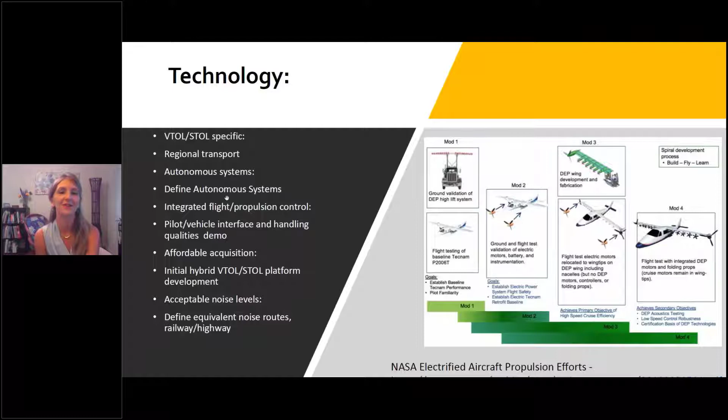Knowing the market and future demands of our communities is important to the success of a rapid implementation of eVTOL. Making these assessments, expanding on and leading with these resolutions will make it easier to implement into the community efficiently.

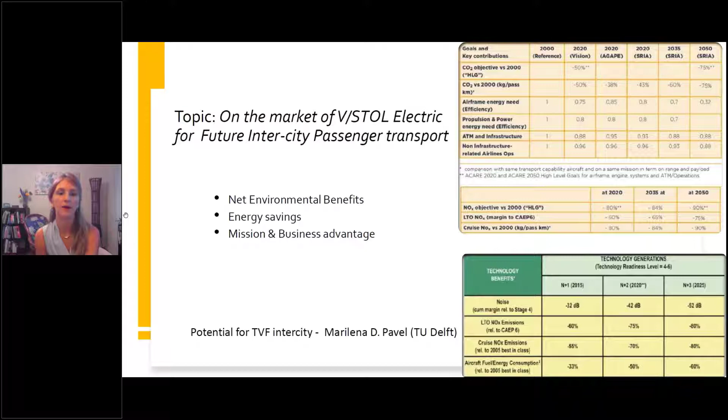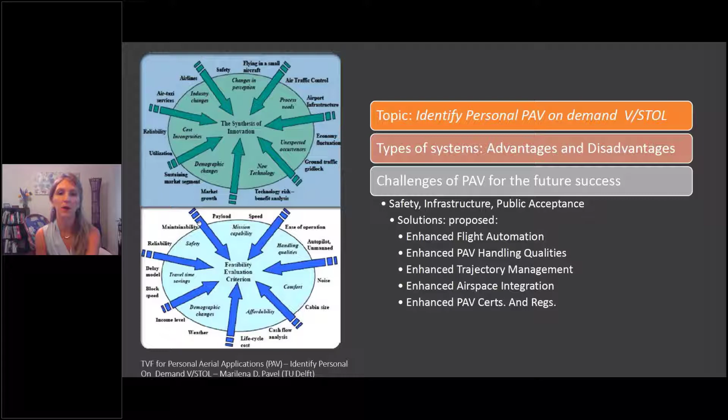We're looking at identifying the advantages and disadvantages of each type of system and its applications through our catalog informatives, as well as our white paper that are contributed by our members.

Once we have established these topics, understanding feasibility and direct implementation challenges, we can begin to look at and help guide certifications and regulations surrounding our newly designed community airspace.

We have found infrastructure as a key component in the revolution and integration of community airspace. Without having acceptance, feasibility, and functionality here, other challenges quickly arise. It is important to understand the direction of electrification in the urban, suburban, and regional environment, as well as how this infrastructure will tie into existing infrastructure in varying locations. We have found that every topic we discuss becomes a part of infrastructure very quickly.

Our working group also supports an internship program to help decipher some of the topics we were discussing, including a comprehensive review on battery technology, as well as pre-design and sizing technology for dual energy aircraft. We work with universities as well as professors.

For the long-range commercial airspace, we're looking at what is possible now and what we expect to see in the future, up to 20 years from now, with different technologies.

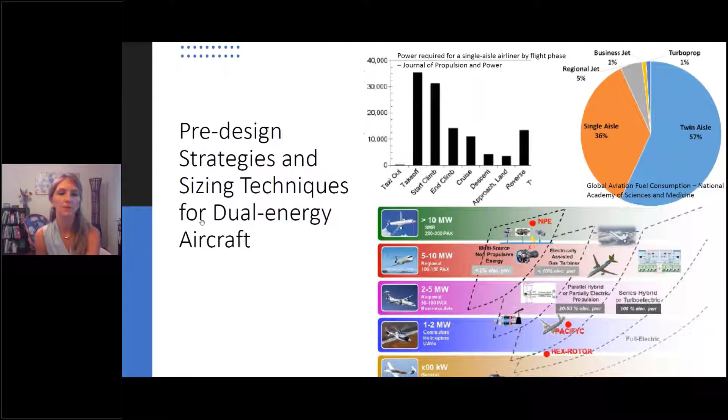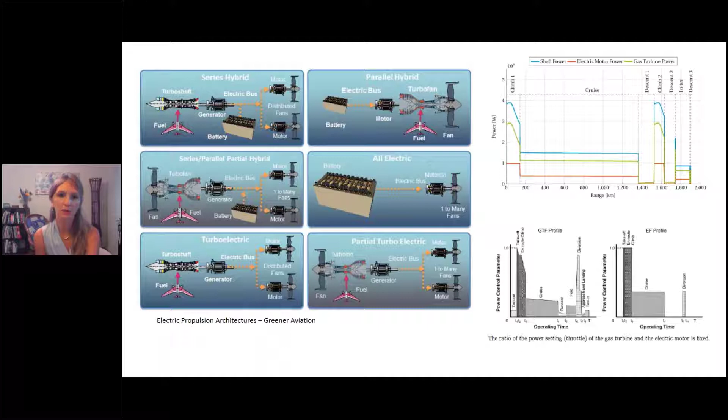The technological aspect of this is crucial to identify and select efficiency and potential for rapid integration. Electric, hybrid, and retrofitted aircraft are essential to this movement.

Full technological review and comprehension of existing and prototype aircraft help our industry members move forward in the right direction.

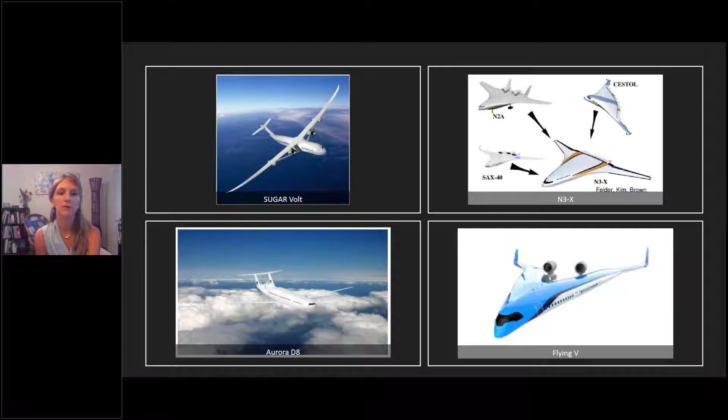Our white paper is the most comprehensive approach to rapid integration of TVF commercial airspace that we're hoping to publish in the next few months with NASA and the Vertical Flight Society.

This will be a guide not only for our industry members, NASA and other government agencies, but cities and communities at large around the United States and the world. We have international members and industry incorporated into our approach to ensure an expanding and easily implemented market happens sooner than later.

We're asking industry-specific questions such as fuel source, storage capacity, size, and physical traits that fit into vertiport design, required temperatures, pressures, or constraints to be co-located with another source, constraints related to vertiport design, rooftop, etc., intercity connectivity ranges, public transportation versus private, whether they have a timeline to be selling certified products or timeline to commercialization, and manufacturing versus provided flight service.

We're looking at approximately 20 sections of discussion across acceptance, technology, infrastructure, and certification and regulations.

The culmination of our white paper includes a 3-city case study intended to define parameters of implementation for TVF commercial air across U.S. cities as a platform and template intended for reproduction.

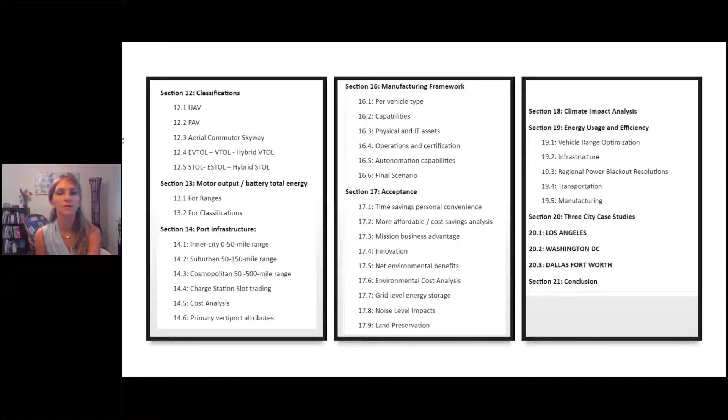We have identified 3 ranges within our working group's parameters: inner city, 0 to 50 miles; intercity, 50 to 500 miles; and suburban environment, 50 to 150 miles. We're looking at PAVs, commercial applications, and cargo as well.

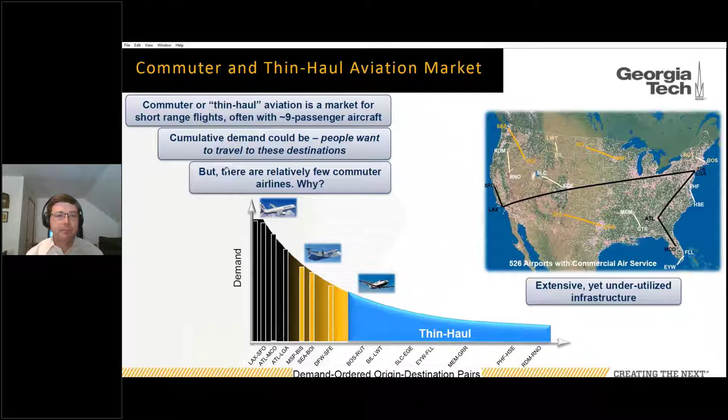Now, to close the business case for some of these operators, and in some particular applications, there's the so-called Essential Air Service Program, which is a congressionally subsidized program to, in the post-deregulated era, offer routes that are typically rather thin, but they're absolutely critical for those communities.

So many of these airlines fly essential air service routes, but they also fly routes that are not subsidized, that are economically viable. And those routes tend to be flights for which the comparative road route would be very long or very, very circuitous. And so flight is really the winning value proposition. Next slide, please.

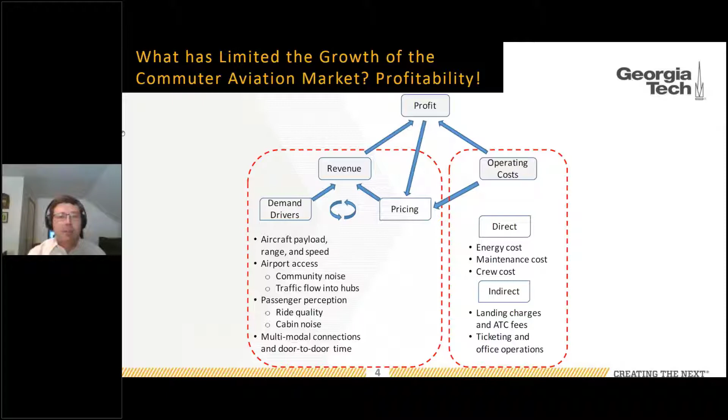So in this we see opportunity, because this is an electric aircraft symposium. One might ask the question, what could we do to address the energy cost issue and the maintenance cost issue with electrification? On a per unit energy basis, we can source energy from the electrical grid, arguably quite a bit less expensively than we can source aviation gasoline. And on the maintenance side, if we go to electric propulsion systems with fewer moving parts, we can potentially dramatically reduce the maintenance costs as well.

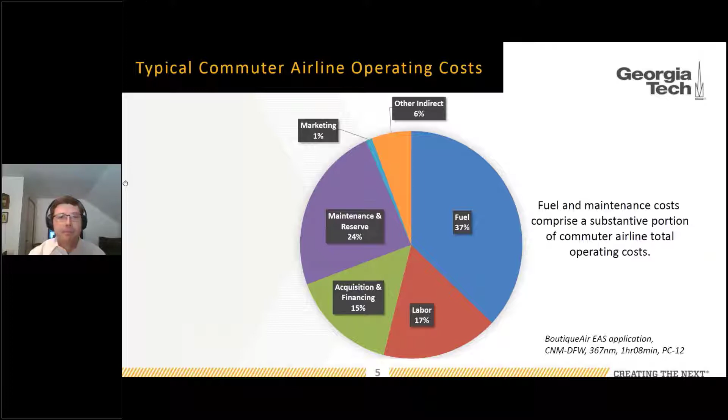The fuel cost and fuel efficiency piece of the puzzle is quite important, and we know that electrification can impact this. But if we first look at what the fuel efficiency is and the corresponding fuel cost implications are for a traditional piston engine powered fixed wing aircraft, we can see that the picture is actually pretty surprising. It's not a very good picture.

Namely, we end up with aircraft like the Cessna 402 and the Pilatus PC-12 having thermal efficiencies on the order of 23 to 28% range for these two aircraft, sort of buried in the numbers on the right-hand side of the slide. The corresponding result is a relatively low specific range of the airplane, measured in nautical miles per kilowatt hour in this case, rather interesting unit. Next slide.

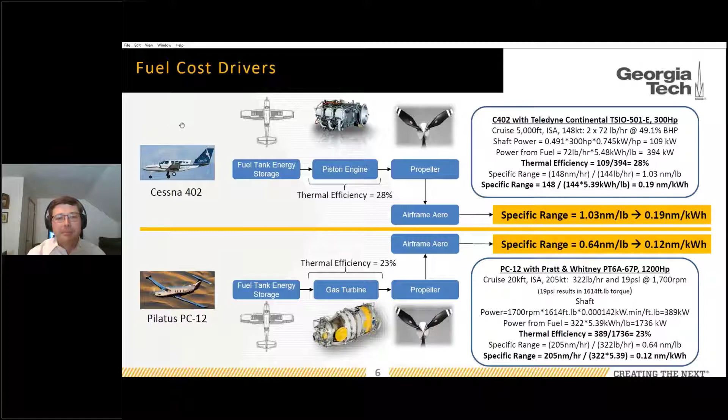So again, how could we improve that situation? NASA looked into this in the 2016 timeframe through a series of workshops and meetings organized by the National Institute of Aerospace. There were a series of working groups that looked specifically at this problem and asked what we could do in terms of vehicle technology to reduce the energy costs, to reduce the maintenance costs, but also to look at the airspace integration issues and other aspects that would facilitate an improvement in demand for these types of air services.

Here's a list of the conclusions from that series of workshops, indicating the value of electric propulsion, simplified vehicle operations, airspace integration, manufacturing and integrated structures, for purposes of both reducing aircraft empty weight and improving the fuel energy costs and energy requirements, but also the ability to manufacture these aircraft quickly enough and at low enough cost. And finally, community impact, which is something we're very cognizant of in urban air mobility, and also looking at those considerations from the standpoint of regional and commuter flights.

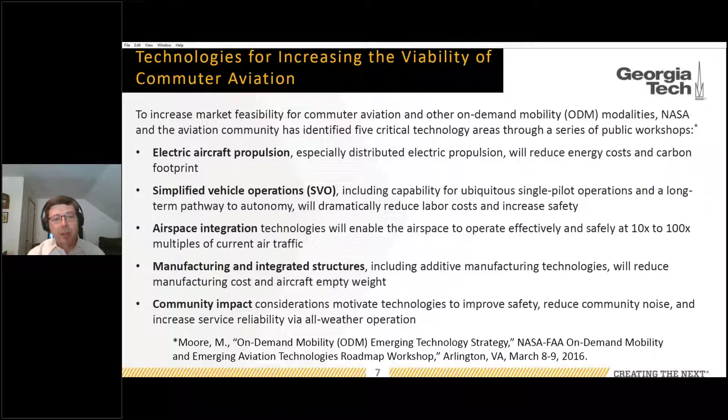NASA was looking at these sorts of technologies through their X-57 program, which is still ongoing. At the time, Joby Aviation was also doing studies for NASA looking at electric fixed-wing aircraft with distributed electric propulsion that could achieve considerable energy cost reductions. Joby's now moved on to look at a lot of exciting new VTOL technologies, as Greg was just talking about in this session.

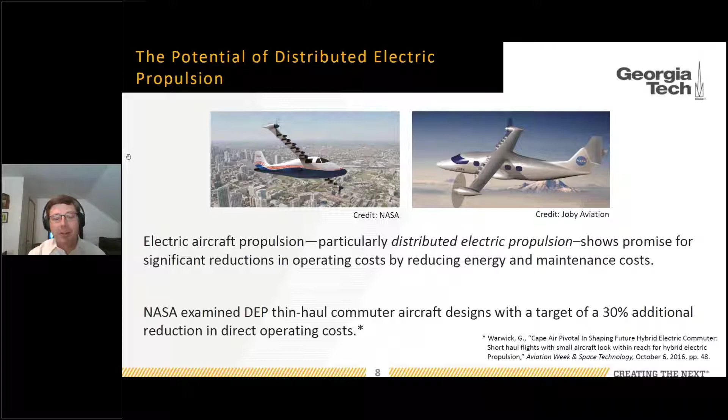The key advantage of distributed electric propulsion for commuter aviation could really be looked at as getting the energy cost out of the system. From a pure efficiency standpoint, electric is a clear win. Of the amount of energy we store on the aircraft, we can arguably extract on the order of 90 to 95% of that energy to the shaft of the propeller—a significant thermal efficiency from the transfer of energy storage to propeller power. This is in contrast to on the order of 23 to 28%, as we showed earlier, for a typical piston engine aircraft. So in that case, the situation is really quite wonderful.

However, the challenge, as we all know with all electric aircraft, is storing the energy. How much energy can we actually store aboard the aircraft? That's highly limited by our battery-specific energy, which is the big technical challenge that everyone's working on across the entire realm of electric flight.

But the potential comes once we've embraced electrification to distribute propulsion, to achieve favorable aeropropulsive interactions. In the cases that NASA looked at in the X-57 design, for example, the ability to do things like cruise size your wing, to allow the size to be reduced, reduce wetted area, increase wing loading, and potentially dramatically improve the aerodynamic efficiency.

Hi, Yolanka. Can you hear me clearly? Yes, we can hear you. Okay, so I got kicked off the GoTo webinar after, I guess, being on it multiple times this week, so I'm flying a little bit blind. Could we have the slide that says 'the airline,' please? And just confirm it's up.

Yes, it is up. Okay, so in the pioneering years of aviation, an airline was an idea, not a service. In time, airline route maps were published that were manifestations of business plans. The airline product is an origin, a destination, a schedule, a fare, and various amenities. In the short-haul market, frequency builds ridership.

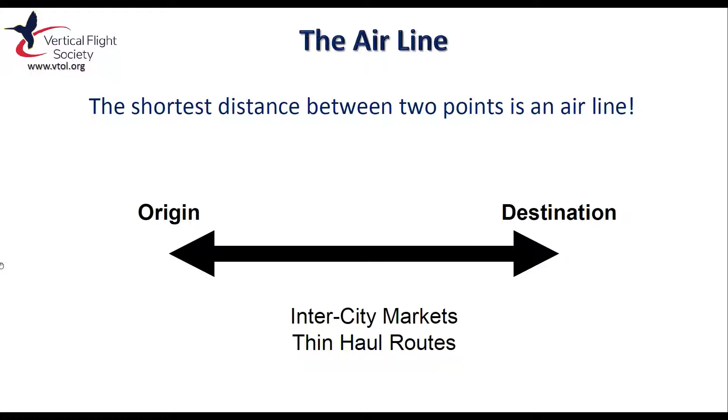When we look at short-haul aviation services today, it can be segmented into a number of different aircraft categories or service categories that are all ripe for electrification. In Canada, we had a great history of bush flying, which meant flying year-round on wheels, skis, and floats. So aircraft designers made rugged aircraft, and one outcome of trying to fly into a small lake was creating an aircraft with great STOL performance.

But short-haul aviation is challenging to both operators and aircraft manufacturers. For short-haul airlines, high-cycle operations come with high operating costs. And as airlines grow, they traditionally abandon the thin-haul routes, especially if they're affiliated with a major carrier, or the time value of their service is undermined by things like airport security and inadequate ground infrastructure, unless alternative modes are not competitive, largely because of geography. So this creates a fertile market for electric aircraft.

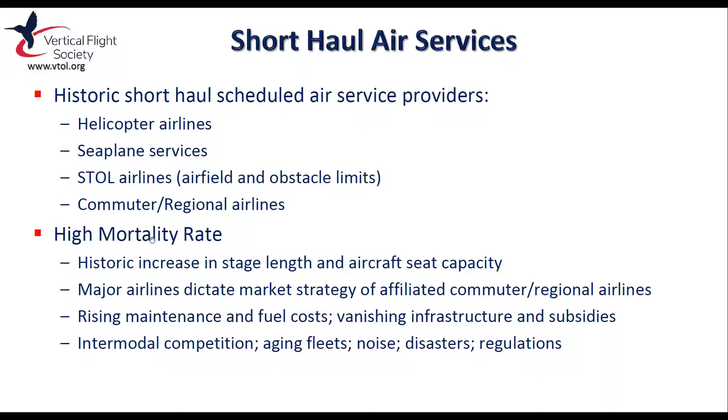If we look at short-haul air service today, one of the target markets for electric VTOL aircraft is a market that was once filled, and is still filled in certain locations around the world, by helicopter airlines. In the 1950s and 60s, thousands of people a month were commuting by helicopter in Europe, Los Angeles, New York, Chicago, and San Francisco. An extensive heliport infrastructure was in place, and the flights were subsidized either by mail contracts or directly by governments.

When government subsidies ended in the mid-60s, there was a high failure rate amongst those helicopter airlines. Today there are 28 helicopter airlines in the world, and for the most part they only fly a couple routes, perhaps with the exception of Greenland. These services, if you look at the maps...

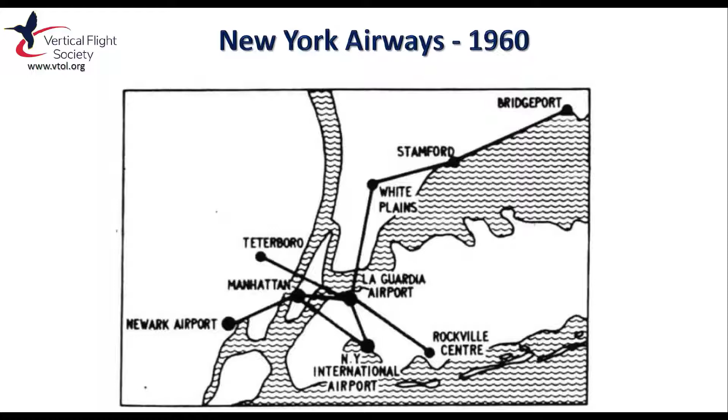This is a historic shot of New York Airways. I'm just going to jump ahead. San Francisco Airways, next. Next is LA Airways.

Because I can't see the screen, I'll just speak to this one for a second. LA Airways offered an extensive helicopter network in the LA basin from 1954 to 1970, after initially starting with airmail flights.

The infrastructure was easy to put in place, but most of the infrastructure that served this network has disappeared as real estate prices have increased and properties have been developed.

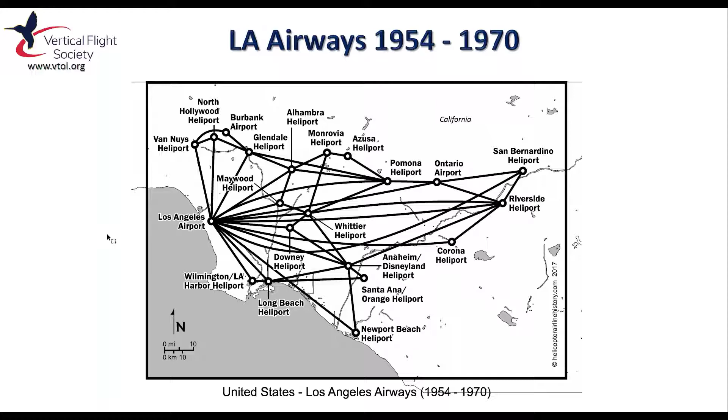To achieve low seat mile costs, LA Airways operated large capacity helicopters, a Sikorsky S-61L with 28 seats, a flight attendant, and underfloor baggage space. But when subsidies from the government and from airlines disappeared and costs increased, the airline folded.

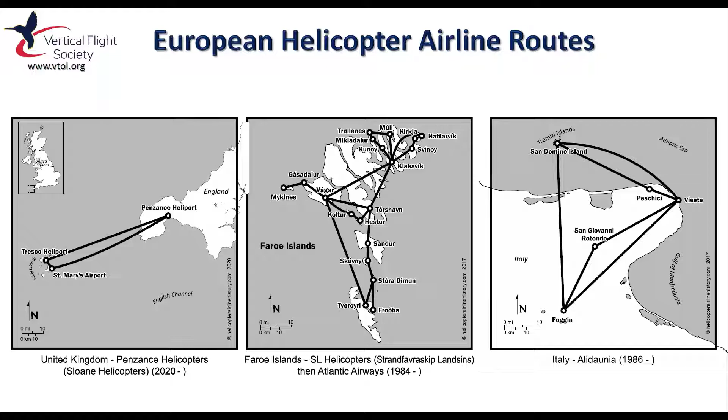If we look at air services today, we have a number of helicopter airlines active in Europe: in Norway, in Spain and connecting to Spanish enclaves on the north coast of Morocco, in the south of France to Nice and Monaco. We also have helicopter airlines serving Penzance in the Scilly Islands in the UK, the Faroe Islands, and Italy. And in Asia, we have helicopter airlines serving Hong Kong, Macau, and Shenzhen, and also offshore in Japan.

And in Greenland, we have an extensive network of helicopter airlines and STOL ports serving the west coast of Greenland, the populated areas. The common element in all those route maps of current services today is geographic obstacles, largely water.

One of the most successful helicopter airlines is Helijet International in Vancouver, British Columbia, my hometown. I was there when they launched service in November 1986 and took off on their first flight, and everyone predicted the company would fail. But they had the right O&D markets, the right infrastructure, the right passenger base, the right fare structure, the right aircraft, and most importantly, the right management.

Today, Helijet is looking at opportunities to integrate eVTOL aircraft into their trunk routes, serving Vancouver, Victoria, and Nanaimo. They also see opportunities to extend that service to Seattle, and this will be one of the topics covered in the Cascadia session tomorrow.

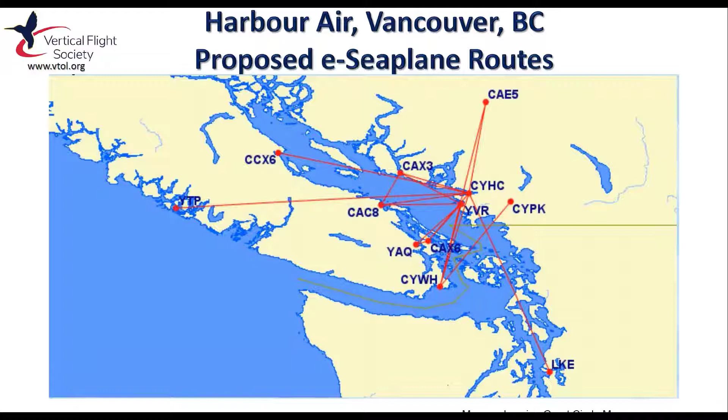Here is Harbour Air's current route network, which includes the southwest coast of British Columbia mainland, as well as points on Vancouver Island, and they also fly harbor to harbor, Vancouver to Seattle, transporting tech workers.

Another market segment is short takeoff and landing aircraft. STOL aircraft require a number of technology innovations: high lift wing, increased flap deflection, leading edge devices, upper surface blowing to create high lift coefficients.

A STOL aircraft is capable of a 4.5 or greater glide slope, and many of these aircraft, at least the turbine ones, have had beta on the PT6 engines to allow them to, in a sense, use the propellers as air brakes. There have been a number of very successful STOL aircraft manufacturers, and NASA has undertaken extensive research into STOL aircraft using the QSRA and the augmentor wing jet aircraft.

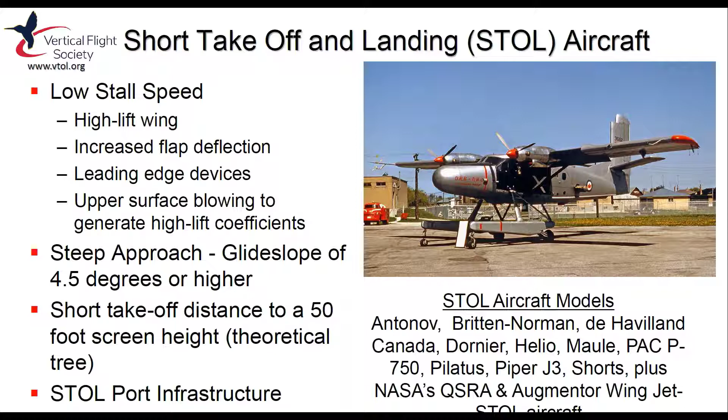De Havilland, with the development of the Twin Otter, also promoted commercial air service into small general aviation airports that had short runways, and also worked closely with the government of Norway, developing with Widerøe, one of the national carriers, a network of STOL ports along the Norwegian coast that were gradually upgraded to larger aircraft such as the Dash 7 and the Dash 8.

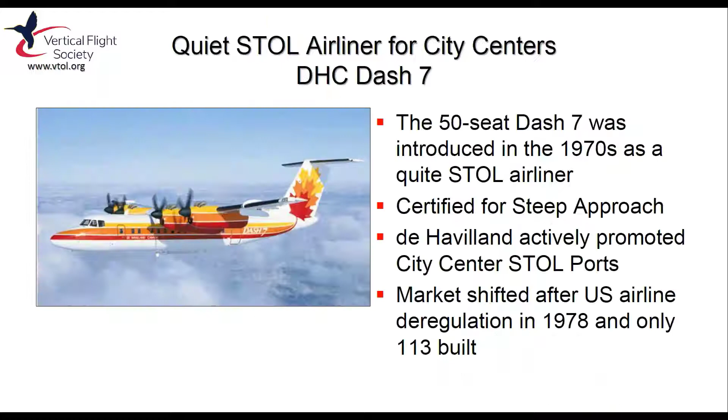The Dash 7 was, I guess, the pinnacle of the STOL airliners, but the timing was wrong. It was a 4-engine, quiet, short takeoff and landing aircraft that could land on gravel runways, but it was launched just prior to US airline deregulation, and the market shifted. Airlines were interested in faster aircraft with fewer engines and better operating costs.

One outcome of the STOL investment, however, was London City Airport, which was opened on converted dock lands on the Thames River. It began using a steep approach with the Dash 7 and was gradually expanded to other aircraft. It's a case where STOL aircraft and STOL infrastructure went lockstep together and created a new air hub.

If we look finally at commuter and regional aircraft in the conventional sense, this chart shows the delivery stream of aircraft between 20 seats and 149 seats. If you look over time from 1969 to 2009, you will see that the number of small aircraft deliveries declines as airline demand shifts to larger capacity aircraft.

Today, there are almost no regional aircraft under 40 seats still in production, except the Twin Otter, the single-engine PC-12 by Pilatus, the Cessna Caravan, and new piston models like the Tecnam P2012 Traveler, which has been delivered to Cape Air.

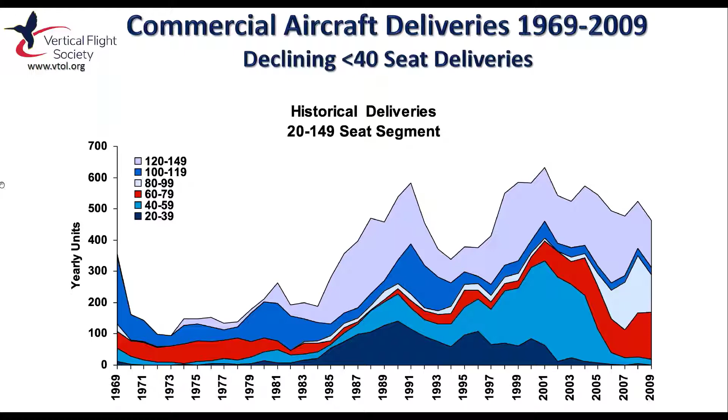One of the most interesting things is that since 2000, so over the last 17 years... let me start again here.

Next, the decline in U.S. short-haul traffic was the result of airline consolidation that led to a drop in short-haul services, and retirement of smaller regional aircraft as airlines upgraded from 19-seat aircraft to 30-seat to 40-seat to 50-seat aircraft, and particularly the introduction of regional jets by Embraer, Canadair, Bombardier, and Dornier.